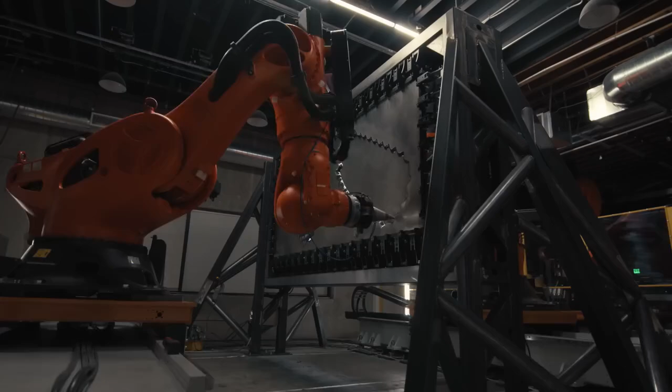This could be the factory of the future. Actually, this could be several factories of the future. We have automotive parts manufactured in the morning and then aerospace parts manufactured in the afternoon. This is called roboforming. It's a new way of shaping metal by using robots and artificial intelligence.

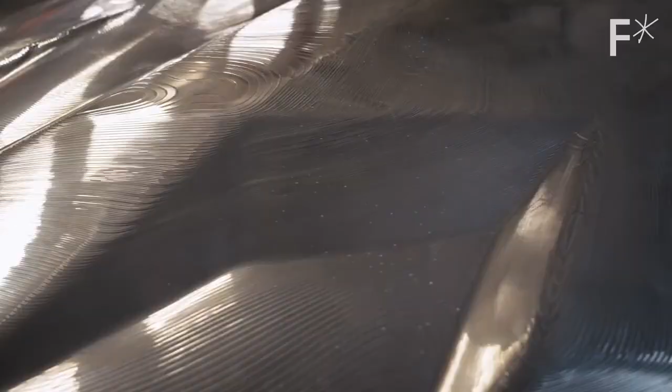Why do this? We're still manufacturing things the same way we were making them 100 years ago. To make the next leap and keep up with the digital world, we need to accelerate the physical world, and that requires for manufacturing to go to the next level. Right now, most metal manufacturing is sheet metal forming, basically stamping metal into a shape. Sheet metal industry right now is a $250 billion industry.

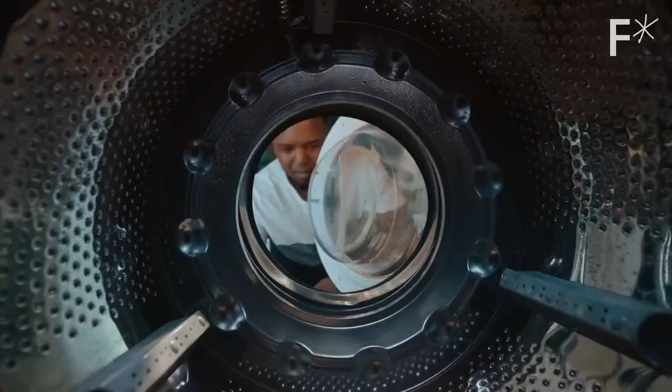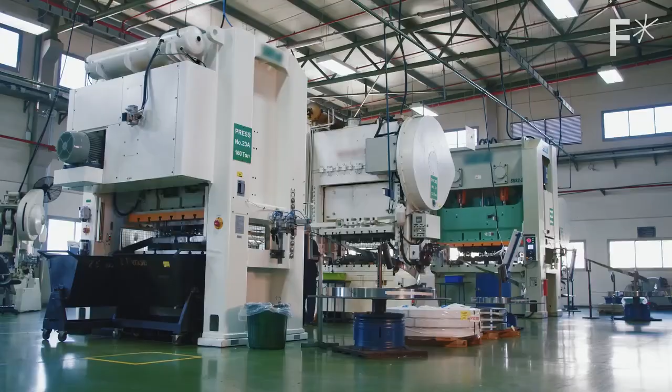Most metal parts you see day to day are sheet metal parts. You're driving in a freeway in your car, you're basically sitting in a sea of sheet metal. Or you're sitting in an airplane. It's basically a sheet metal aluminum can. Even electronics, all sheet metal, sheet metal, sheet metal. Sheet metal forming is fast and cheap, but there's a downside. You have to build a factory to manufacture the parts, and most factories are very specifically built for the design you're trying to manufacture. It's not easily changed, it's very expensive.

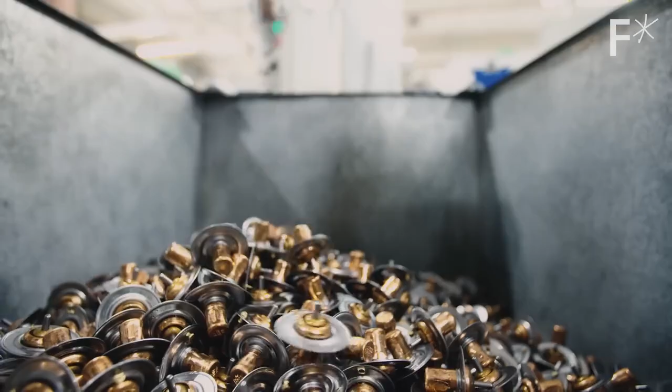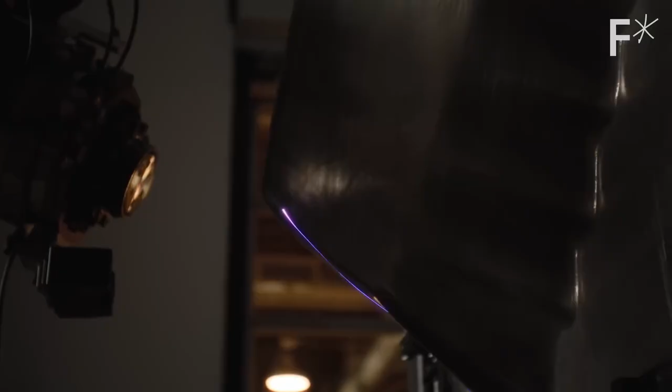The uniformity of our world is an artifact of the assembly line and the way we manufacture things. But this technology could create a world where custom manufacturing could be just as affordable and efficient. I'm working on a product that allows you to design a new car and start manufacturing it today if you want. Our scanning technology allows us to look at the part and form those without the need for stamping, the same agile way that craftsmen did it.

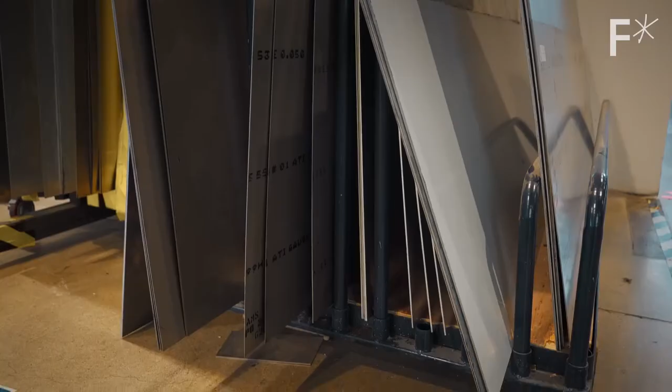This is some serious metal. Actually, it's heavy metal. No, I mean, it's really heavy. It's like a 1/4-inch thick steel plate. Stick around to meet the robots that will build the future.

This is Hard Reset, a series about rebuilding our world from scratch.

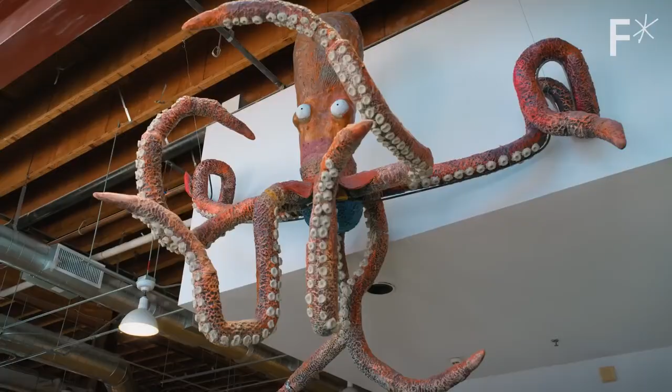We came to Chatsworth, which sounds like a fancy butler, but is in fact a city in the greater Los Angeles area. Why here? Because that's where Machina Labs is, a company that is trying to change the way we make things. This is Ed. He founded Machina Labs because basically he wanted a robot blacksmith. I mean, who doesn't? Manufacturing used to be arts and crafts.

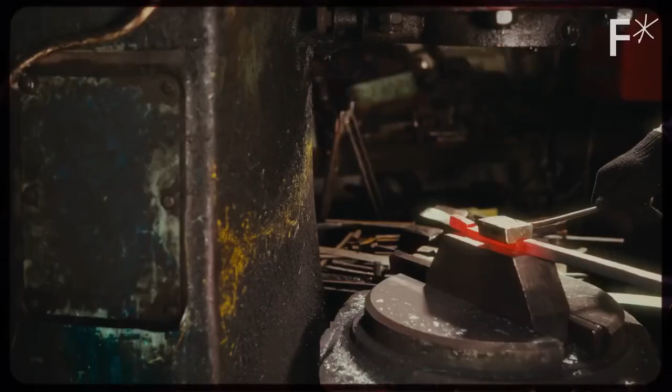So back in the day, they used to bump form, and bump forming is a process where a craftsman sits behind an automated hammer and slowly deforms a sheet of metal into a shape. Kind of almost conquering physics, right? They can incrementally deform with the limited tool set that they have, a bunch of hammers, maybe a few handheld tools, but how can they use the set of tools that they have in a creative way to get to a

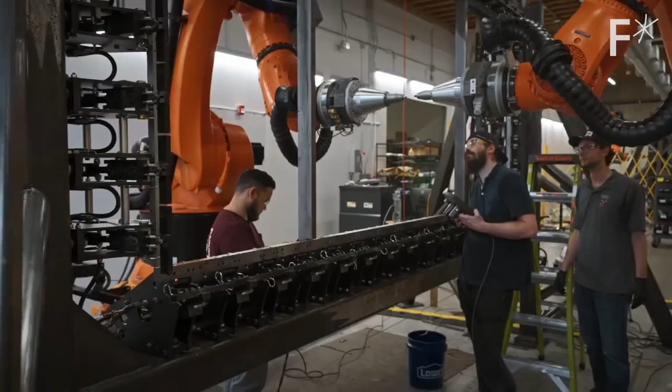final part? So what we are trying to do now is, can we do what those craftsmen did back then, but using robotics and our system, and form those without the need for stamping, the same agile way that craftsmen did it in the past.

Yeah, so can you tell Cell 1 folks when they open the clamps, they don't drop it? That's okay. This pause gives us a moment to appreciate Ed's magnificent beard. It's just a masterpiece of beardsmanship. Yeah, anyway, let's move on.

All right. I come from the additive world. I was in charge of a team that was building a very large envelope metal 3D printer for aerospace applications. Ed is being modest. He was helping build a rocket for a little startup called SpaceX. So when I was at SpaceX, we had this very large, complicated problem. We were building large tanks. Think of a tank for a rocket that's 22 feet tall and 12 feet in diameter.

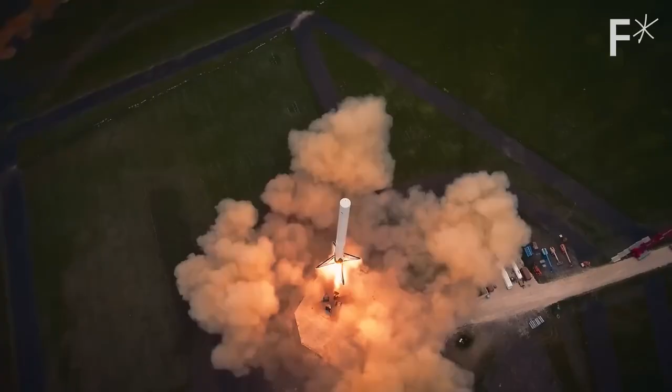And when we were working on Falcon, and Falcon 9 specifically, the diameter of the Falcon 9 tank could never increase because there was so much tooling that went into that shop floor that was specifically built for that diameter. So if you want to add more fuel to that vehicle, you had to just make it taller. But you could never make it larger in diameter. You couldn't make the rocket fatter. So even a company like SpaceX has this challenge in terms of, once you lock into that design, you kind of have to stick with it.

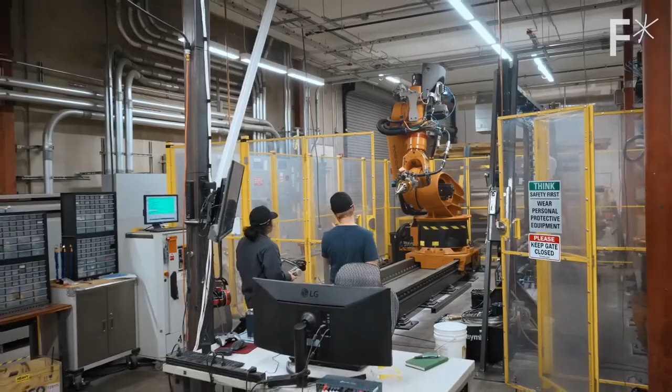In order for us to build the process, we had to take that concept of craftsmanship and see if we can scale it. And once you're looking at the details, it's actually very complicated. Because what happens in the mind of a craftsman or sheet shaper is pretty complicated. It has dexterity, so we needed robotics to replicate the dexterity of their hands. But then we also need to replicate what's happened in their mind.

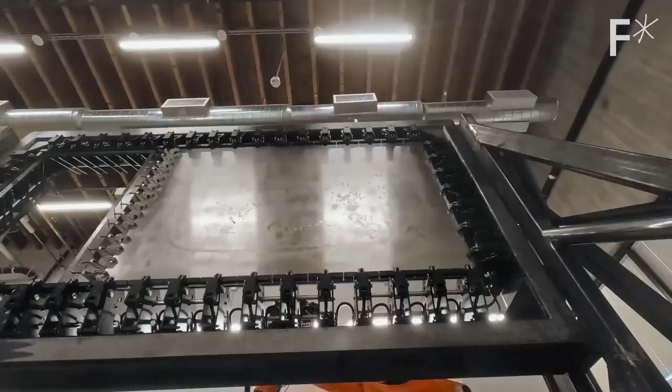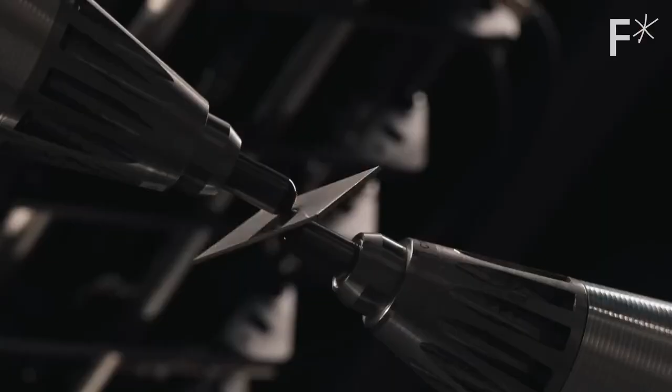Instead of just stamping out a shape onto these metal sheets, these robots push on it to create whatever shape you want. Actually, one robot pushes and the other supports. The support part is super important, because if you just pushed from one side, you'd get a big, stretched out mess. Using two effectors allows you to control exactly how and where the metal bends. This is Michael.

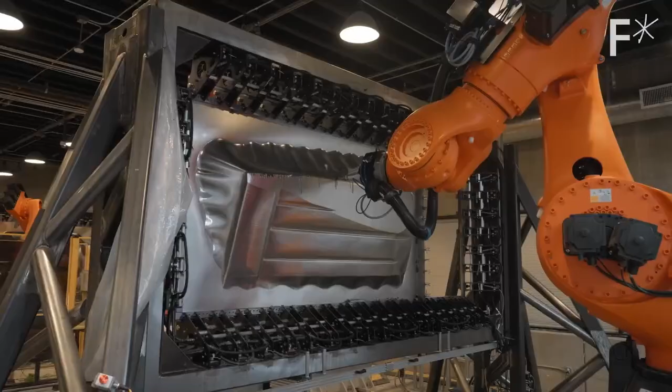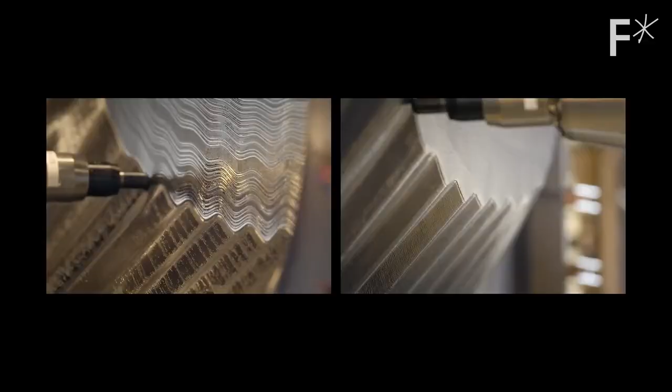No beard. It's a bit of a dance between two very synchronized robot fingers that are slightly offset with each other, and they're kind of gently pinching and rolling metal and extruding it. And when we actually form parts on the cell, we're not just moving the metal out in space, we're actually thinning it out to achieve the angles that it needs to achieve to form a part. This beautifully orchestrated dance allows the robots to slowly nudge the metal into whatever shape you want.

You might think this is pretty straightforward, but people have been trying to do this for a long time. Well, not quite that long. This method of sheet forming, people have started looking into it since the invention of CNC. Have been doing research in this area for the past, I would say, actively maybe past 20 years, but loosely the past 30, 40 years.

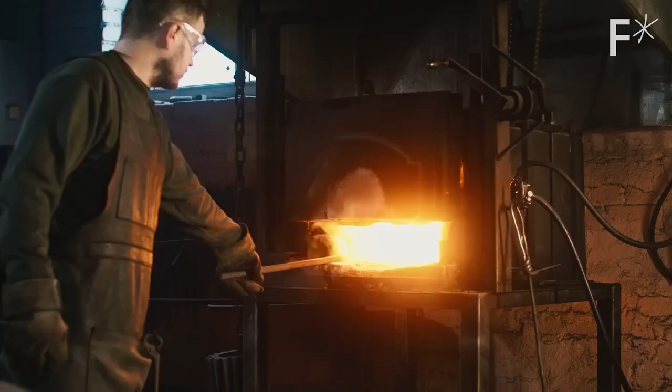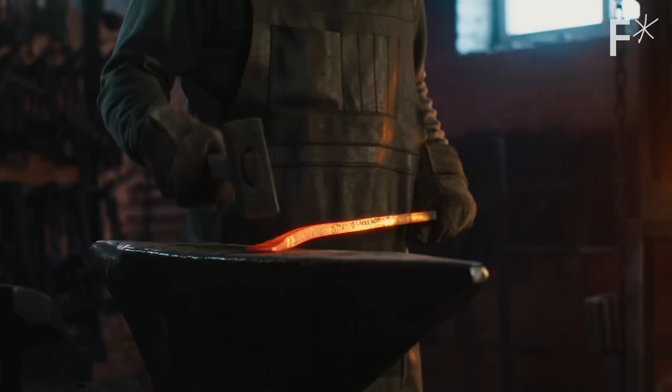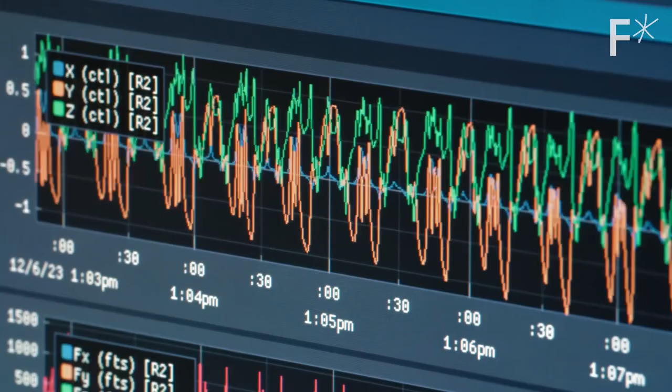A blacksmith doesn't just hammer on metal. They are constantly observing how each blow has changed the object and adjusting, changing the way they hold it or strike it next time. This is a feedback loop that requires tremendous skill, patience, and intelligence. And until recently, robots weren't really intelligent enough to both manipulate the metal and observe and adjust to how it has been manipulated. From a hardware standpoint, what we're doing has been possible for a long time, but from a software standpoint, it was very, very hard.

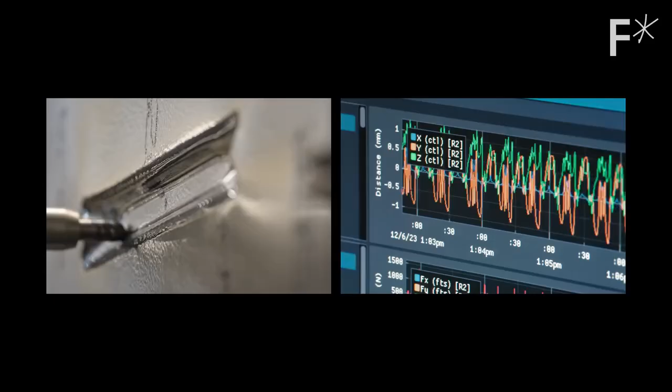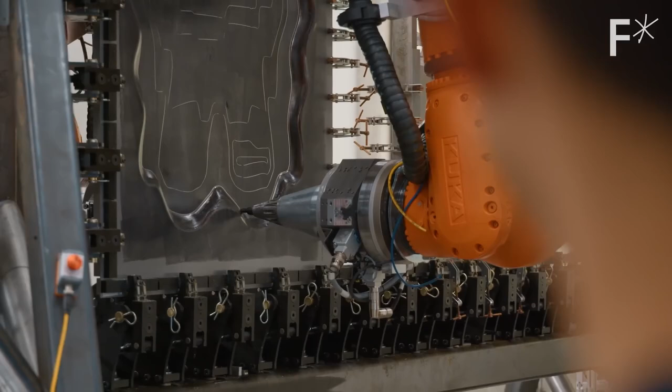So our access to GPUs, our access to neural network type models were incredibly helpful for us in sort of being the brain of the craftsman. And we will even touch material with our robots, sense what's happening, and then feed that back into models that can essentially do what a craftsman is doing. It's like, okay, this alloy is feeling a little bit rigid today. We're gonna have to compensate in this direction. The robots here are constantly sensing and compensating for super complex forces, which has only been made possible by machine learning. In fact, the intelligence that makes this happen is the real star.

These robots are actually just industry standard robots. What we do here uses a lot of off-the-shelf and commodity hardware. In fact, one of the really successful cell systems that we have in the building, I'm not going to point out which one, but we bought it on eBay actually, the robot.

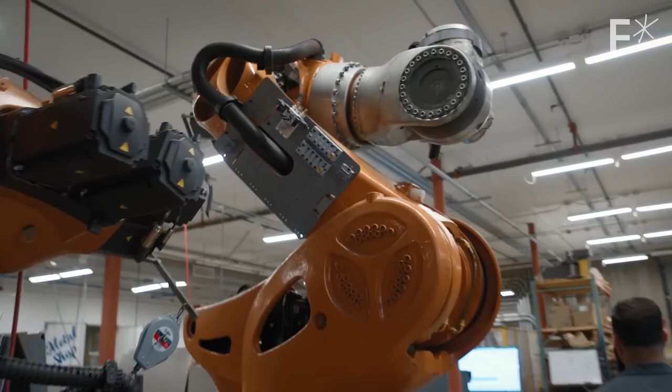I was told you bought these on eBay. I buy them on eBay. You didn't sound defensive at all when you answered that, by the way. Well, no, I mean, I could have. I didn't buy them. The person who's selling these also sells stuff on eBay. I think that's where probably the confusion came from. Someone was just selling one of these on eBay, and we were like, okay, let's save some money. Let's try it out. One of the joints has a bit of a clunk in it, and it's a little dangerous to use, but it works, right? The darker orange ones are really old. I think they started out roughly this color. But yeah, we did buy them on eBay.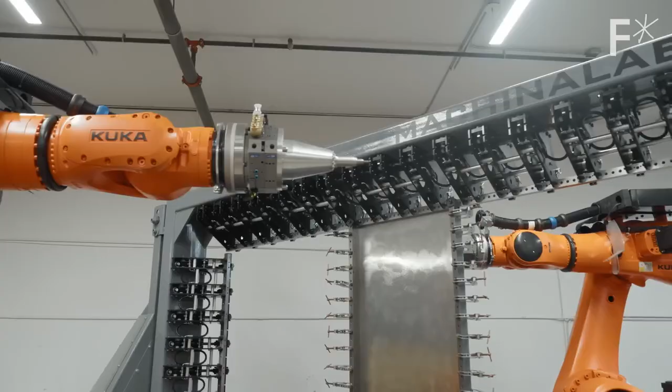I got the sense that the guys from KUKA see what you're doing with their arms and that they feel like you guys are sort of well beyond recommended use parameters. These robots are not created for the intended use, but yes, definitely it's not an application where they're like, oh, you can use robots for sheet forming, right. And I remember in the first early days when I started talking about that's what I'm going to use these robots for, they're like, not doable, don't do it. It doesn't make sense.

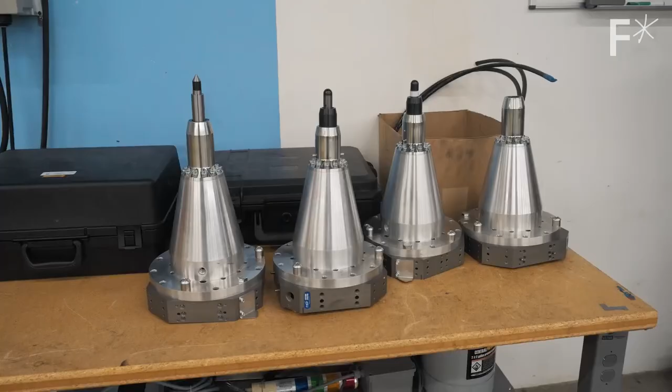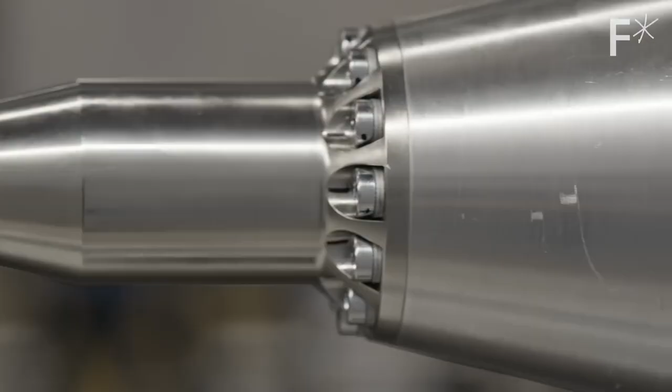So an off-the-shelf robot arm isn't quite everything you need to do this. You also need an end effector that is strong enough to survive the tremendous amount of pressure being put on the sheet metal. So you make all these in-house? Yes, all of these are made in-house. So to some extent, we're vertically integrated. That allows us to basically iterate on designs really fast. The substrates, usually it's out of very hard material that doesn't deform under pressure. So think of carbide and tungsten. Wow, that's heavy. They're pretty heavy material. Wow, that is not light.

One thing I would love for you to show me actually on the arm is sort of where does the standard KUKA arm end and your hardware begin? So you see in this robotic arm, anything after the orange is basically ours. Now, there are a little bit of modifications we might put in terms of sensors added to the rest of the robots to capture some of the things we need to capture. Obviously, we also manufacture the full frame. So everything on the frame, hydraulic clamps, the cooling, everything is also built by us and designed by us.

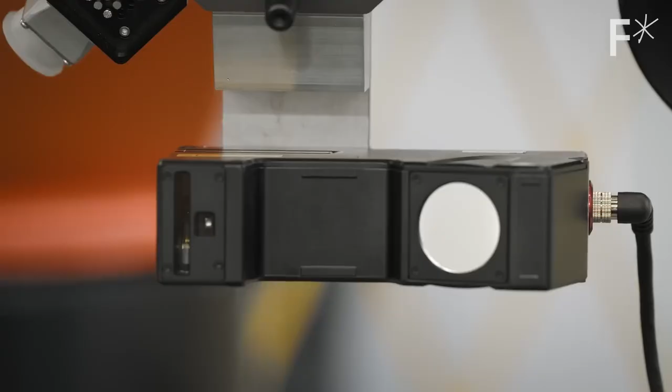The sensors on these arms make them sensitive to the amount of force they're exerting and where they are in space. They can even scan the geometry of the object they're shaping to make sure it's coming out correctly. I'm surprised at how gentle they seem. Although I know there's tremendous force being applied here, it's almost hypnotic to watch them. Yeah, I think right now we're applying 2,000 newtons on one of the sides. So 2,000 newtons, around basically 500 pounds. And then on the other side you have another 2,000, 1,500 newtons.

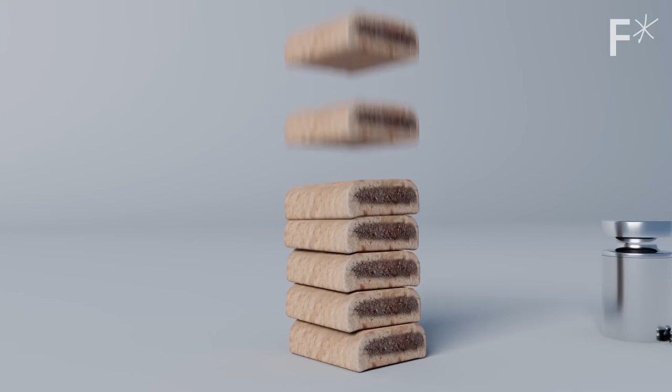A newton is equivalent to about 102 grams of weight in your hand in Earth's gravity, which is equivalent to about 6.58 Fig Newtons. So 2,000 newtons of force is about 13,161 Fig Newtons stacked on top of each other.

I am hungry. When is lunch?

Anyway, so now that these robots have the intelligence they need, what will they build? The world runs on heavy metal. Oh, sheet metal. It runs on sheet metal. Actually, heavy metal is a contaminant in groundwater. You don't want that. Look at the appliances around you, or look at cars or airplanes, sinks, bathtubs, ducts, facades, roofing. We use it to make so much stuff. We've been doing it for a long time, and we're pretty good at it.

Manufacturing technologies that are used widely, most of them haven't changed in the past, I would say 60, 70 years. The way we manufactured Model T at Ford, the first mass-produced car, is the same way we're manufacturing Model S doors. Make a very giant, archaic press that just does this with a lot of force, put a sheet in between it and just stamp it.

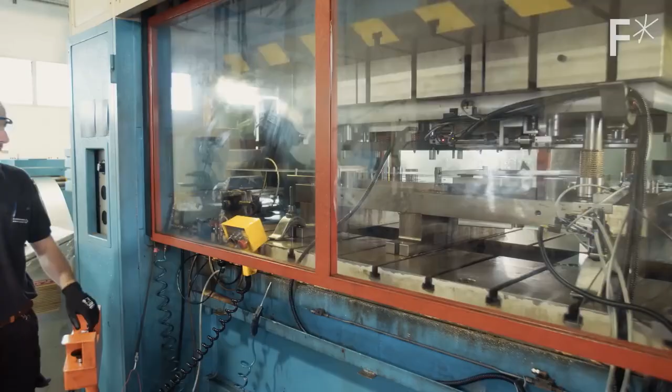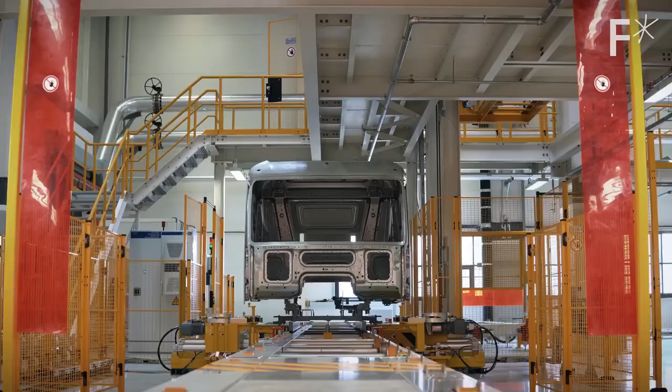Each of the parts that get stamped out requires a huge machine, which requires a huge investment and a long time to set up. We were talking with some of the folks in automotive, a plant that manufactures a vehicle, we're looking at $150 million investment in just equipment. These are plants that are like 500,000 square feet. And then you need to also put in stamping presses that are like 3 stories tall and then 3 stories down in the ground.

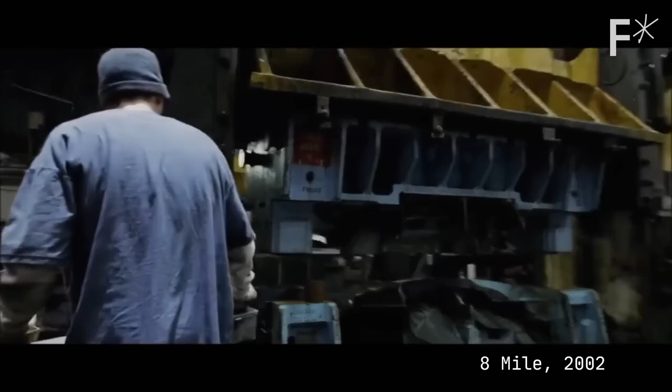$150 million seems like a lot of money just to keep Eminem busy during the day. I don't even want to try and convert that to what it would cost in terms of mom's spaghettis. Still hungry, guys. Oh my God, when is lunch?

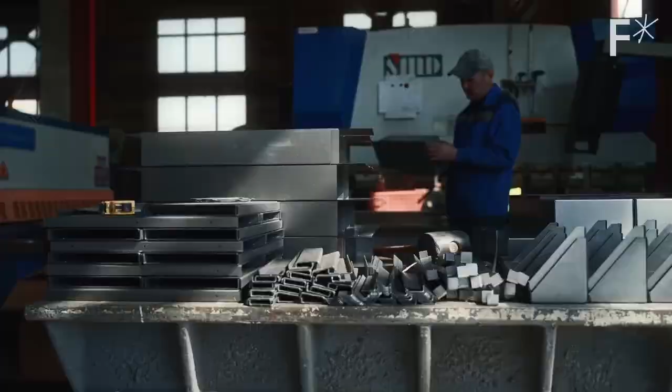You kind of need to be a multinational corporation to make something out of sheet metal. That's boring to me. I don't want the design power for the things that I use to sit in the hands of probably some of the organizations that might be least ready to design the next thing. Ford famously said, everybody can have any color as long as it's black. Because I need to change my factory if you want something custom. And I will never be able to do that.

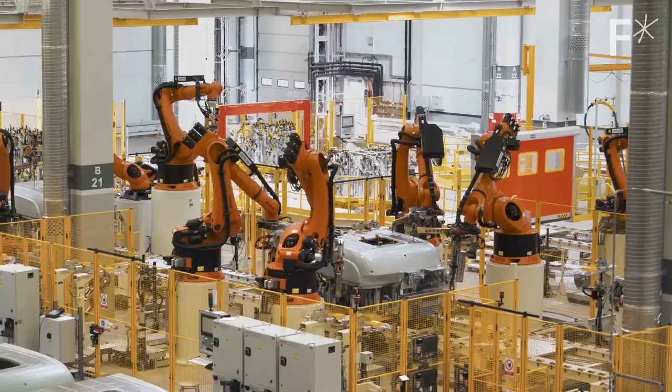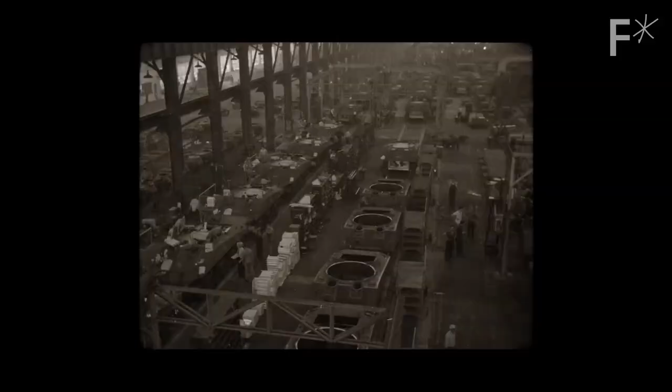Manufacturing on an assembly line locks you into a specific way of doing things. Making adjustments like changing colors means changing or stopping the assembly line, which is expensive. The uniformity of modern manufacturing is what has made it fast and affordable. If you look at World War II, what enabled the United States to win that wasn't necessarily superior technology, but much faster rate of production. We could make tanks faster than they could destroy it.

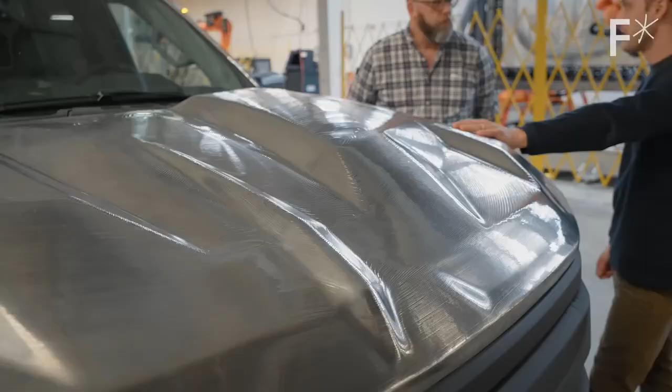But with technology like this, we could see fast, affordable manufacturing that was also customizable and flexible, even on something that rolled off of an assembly line. One of the things we're working on now is the Anvil project. It's our platform for custom car body designs. So what you're seeing is like a very early fit up of this hood that we formed, and you can see it's still very raw, but it is our first attempt at actually getting something on the truck.

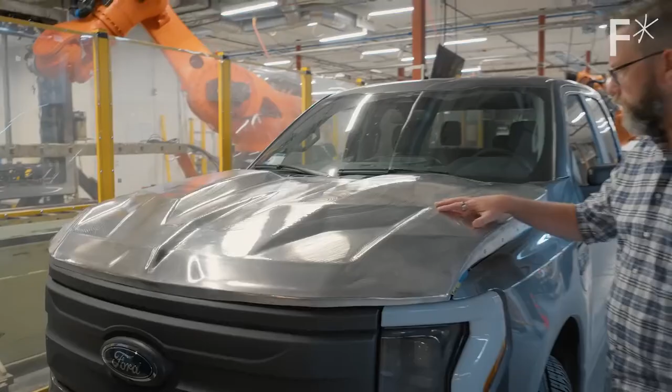The team here is building a totally custom vehicle, replacing all the visible panels of this truck as a way to see how their manufacturing process can integrate with existing products. We're not redesigning the car from the bottom up. We are doing the thing that most people that are interested in custom cars want to do, which is I want to make the outside look badass. So we're going from a truck that you would see on the road to a truck that you would see in like a sci-fi movie, basically.

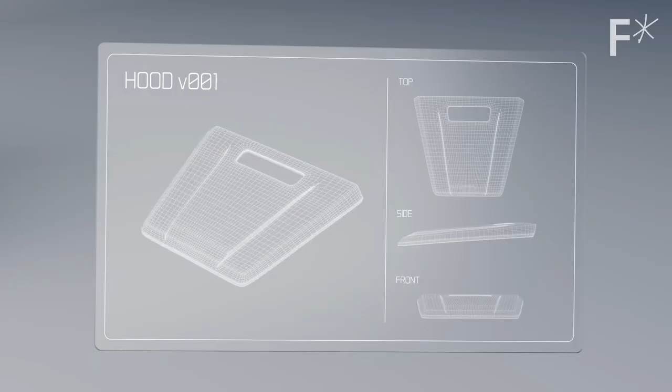So, if you're making a new model of car, you could send the part specifications to a roboforming factory and they could start making parts right away instead of taking years and hundreds of millions of dollars to set up a new factory. And if you want those parts to be customized or changed, that's as easy as loading in a new file with the custom shape. By using this type of robotic technology, we want the cost of this custom car to essentially approach the cost of a commercial car. This project is also a way for them to let the machines practice making parts like this. And I mean that literally.

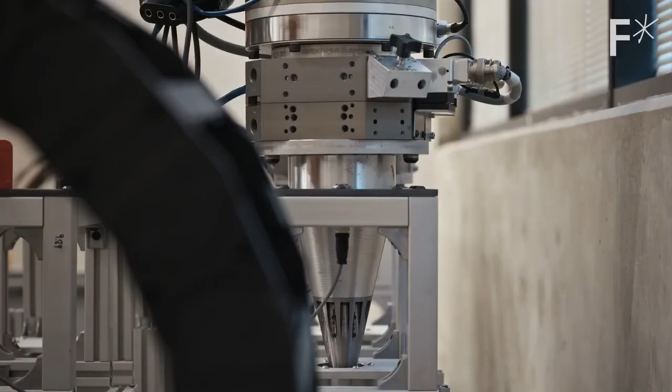Because these manufacturing cells are powered by AI, they learn in a way that is similar to us. Trying, failing, and trying again. And once they've practiced it a few times, they begin to make it perfectly. Whenever I interview candidates to join our team who come from like traditional aerospace companies that are more research focused, they are appalled that we don't like simulate stuff before we do it.

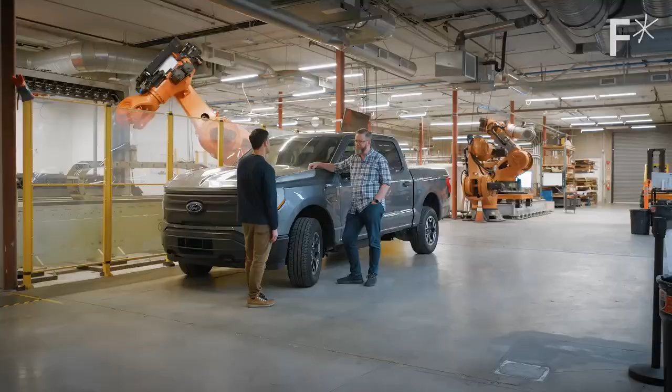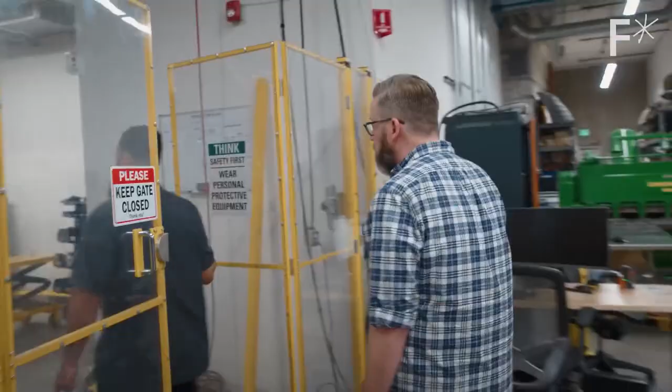Custom parts have more uses than cool hot rods. This is also important for repairing things like exotic airplanes or equipment that they don't make parts for anymore. If I brought you in a part where I'm like, I need this aircraft wing, I can't get it made anywhere. Can you scan that and then kind of create a mesh that then can be duplicated? And what does that process look like? That's exactly one of the things we're doing for the customers right now. If sometimes there's a part that comes in that they don't even have a drawing for, we have to scan the part and rebuild the CAD.

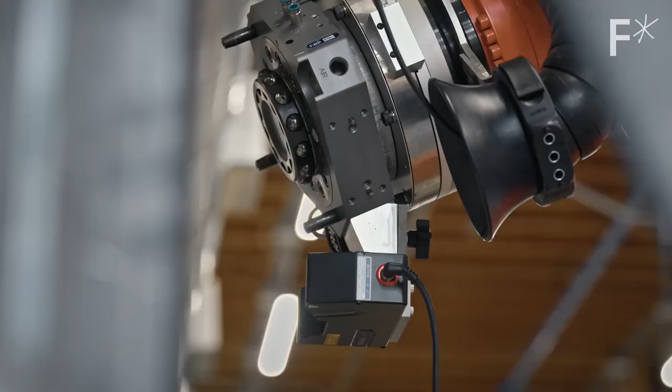And it's part of our stack. You can scan it, it automatically generates the CAD, and we use that to basically pass it through our path planning software to figure out what kind of a path will generate that part.

We lost a lot of these manufacturing technologies. We don't have those manufacturing plants. We went more toward bespoke planes that are very expensive. You have a $100 million fighter jet that's very advanced. It can do a lot of things, but once it gets damaged, it's very hard to fix it.

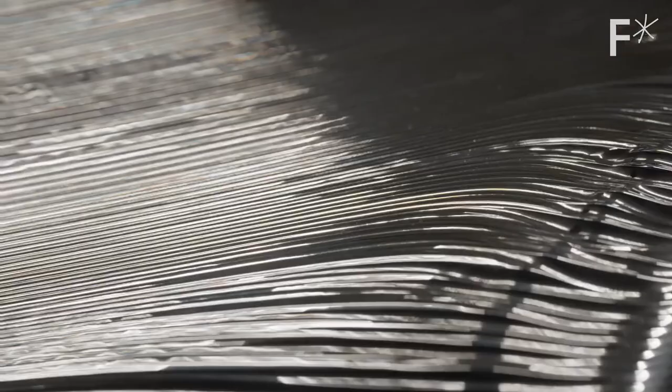It would take years. So what we're working on a lot of times with DoD is, can we bring this industrial capability back so that we can fix a plane in 2 days, 3 days, as opposed to 4 years. At this stage, there are still limitations to roboforming. It's not as accurate as it needs to be for every job, but it's getting better all the time.

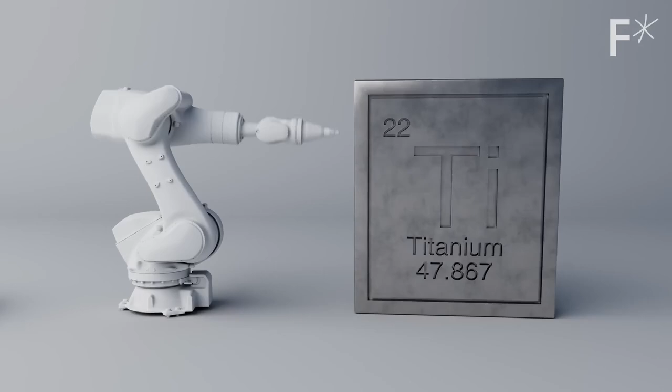It's also getting faster. Beyond just being quick to adapt to new forms, roboforming can also work with materials like titanium and other alloys that were never compatible with sheet metal forming before. That means it'll open up manufacturing capabilities we've just never had.

I mean, if you ever wanted to drive above the speed of sound, you kind of need a titanium truck. Right. So really, for science, I think it's a necessary step you guys need to take. I think so. I think we need to design some sort of demonstration of titanium and do something goofy with it. Yeah, I think it's only fair. Yeah, I agree.

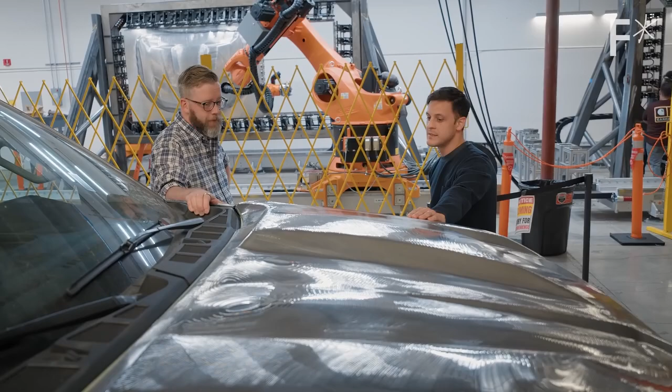Right now we work with a lot of big marquee customers, but ultimately what our team is excited about is what we call democratization of manufacturing. Get this in the hands of the people who couldn't make these parts without joining somebody like SpaceX or the Hondas of the world. Can we enable those guys? Because those are the guys who are going to have the next generation of big ideas that we want to look into and hopefully make. Those tools are going to be very crucial and will change the landscape.

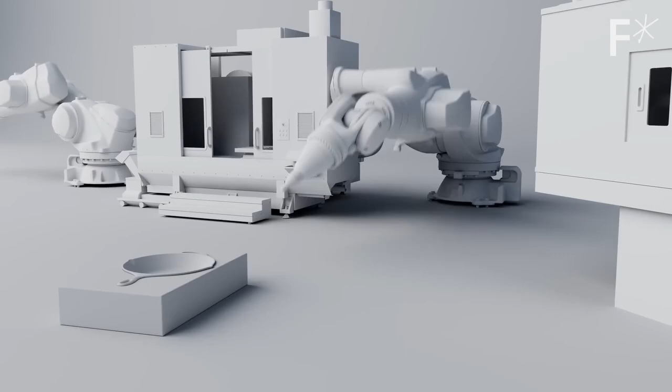So what will it mean when our factories are as capable and adaptable as a blacksmith? Picture a scenario where we rebuilt our manufacturing capabilities from scratch. That world would include a lot of different ways of making things: 3D printing, machining, injection molding, casting, you name it. But sheet metal forming will always be a massive part of that world. So how would it all work?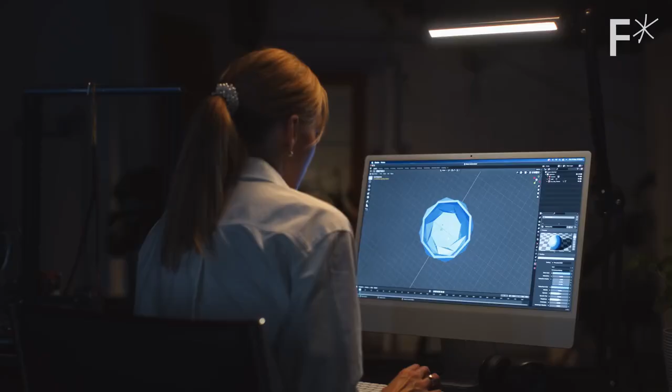I imagine a world where in the future, you as a designer can go onto a portal, upload your design, get guided through how you can manufacture it in the most efficient way, hit submit and say, okay, I want 20 of these in 20 days in Los Angeles, California, and the right facility doesn't look like traditional factories. It looks more like data centers with a bunch of these robotic systems that can be programmed to do multiple operations. I think that would be the ultimate vision where manufacturing needs to go.

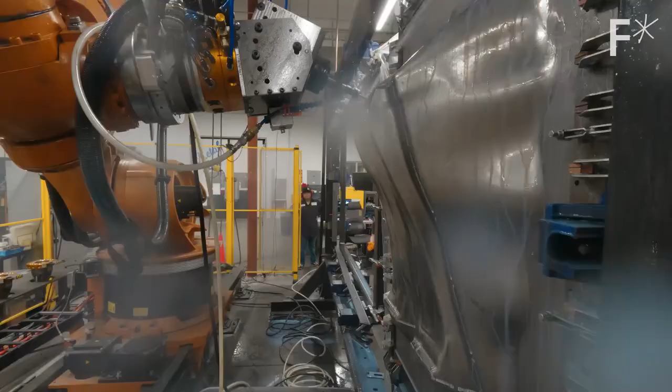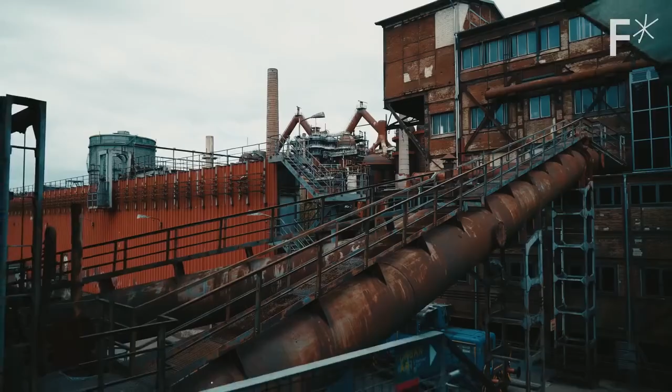But manufacturing this way is about more than just speed and cost. It's also about proximity. Roboforming factories are smaller and more adaptable, and that could change where we build them. If you go to the Midwest, there are areas where we had large manufacturing plants making a certain type of car. Once that car was obsolete, the whole economy around that town died, because that factory could not easily be retooled. It was cheaper to just let it go and start somewhere else from scratch.

But once we move to this new paradigm where you can configure the factory to do different things, you can distribute it, and it can be much closer to the consumers because it's very adaptable. You're gonna have much more stable communities. They're gonna manufacture the things they need very close to where they live, and they can constantly adapt to changes and needs in those communities.

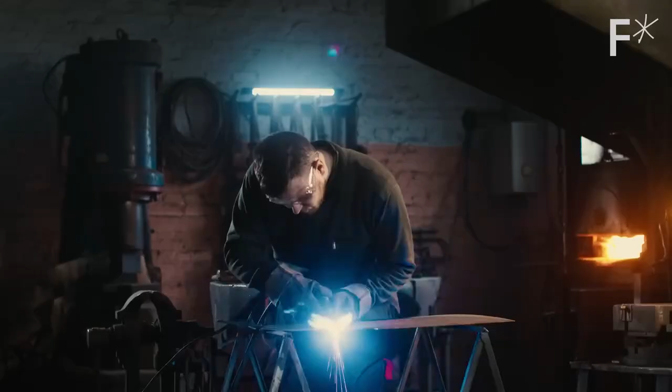When it doesn't take hundreds of millions of dollars to set up manufacturing, smaller companies will be able to make products like cars or appliances. It will mean more ideas, more creativity, and more personality infused into the world we live in. The reason I care about manufacturing is that at the end of the day, manufacturing is still an art. It's a form of self-expression. You are conquering the physics of the world to create something that truly expresses what you want and what you are about.

Yeah, I think they're removing the clamps for some of those frames. I want to make sure. All right, seems like they're gone. Yeah, so